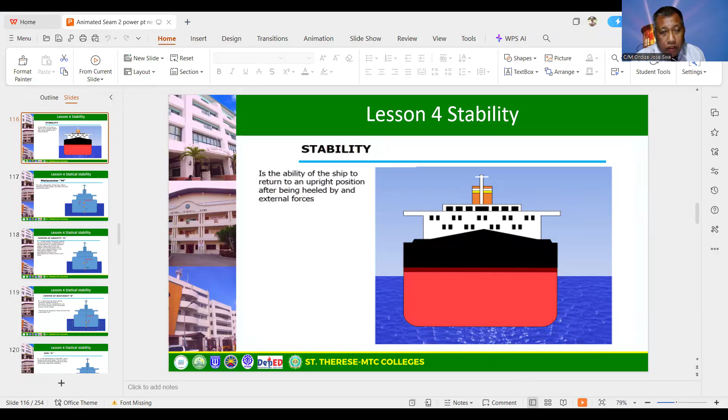Our lesson is all about ship stability. So how do you define ship stability? All of the previous lessons defined some terms about ship stability. It is the ability of the ship to return to an upright position after being heeled by external forces.

So it is acted upon by wind or waves, or any external forces. To compute the stability, we will learn different terminologies like the moment, initial stability, and the movement of the center of gravity. As I said before, the center of gravity will move when the ship is heeled. Once it is stable, when the center of gravity shifts, it pushes toward the center of buoyancy and brings it back. That's why the ship is stable, since the computation of the cargo on the ship is correct. So the center of buoyancy is the moment that brings it back upright.

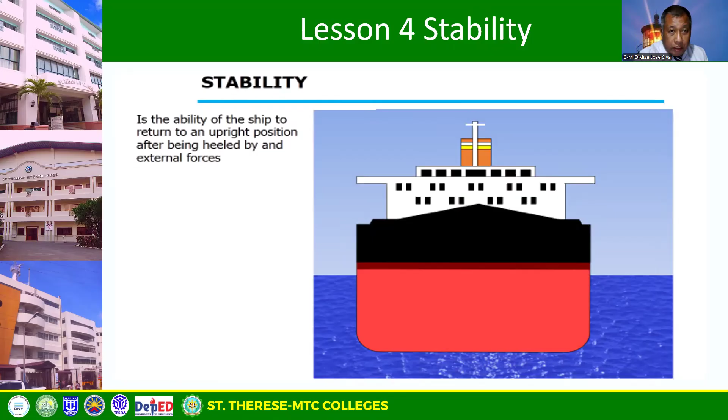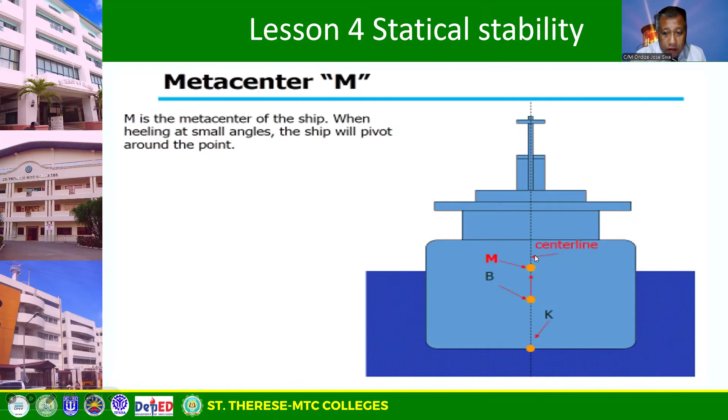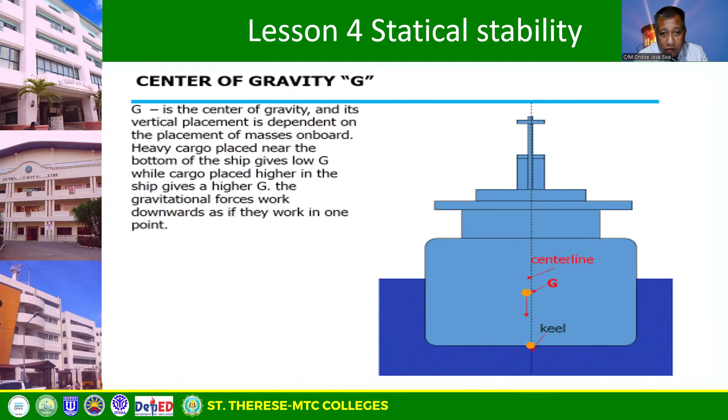So that's how important it is. Since when the center of gravity G shifts, the buoyant force B follows and pushes back to make the vessel upright. That's why it is stable. But if your computation of GM is not correct, instead of making it upright, it will be pulled down further. So let's move on - this is B, the center of buoyancy.

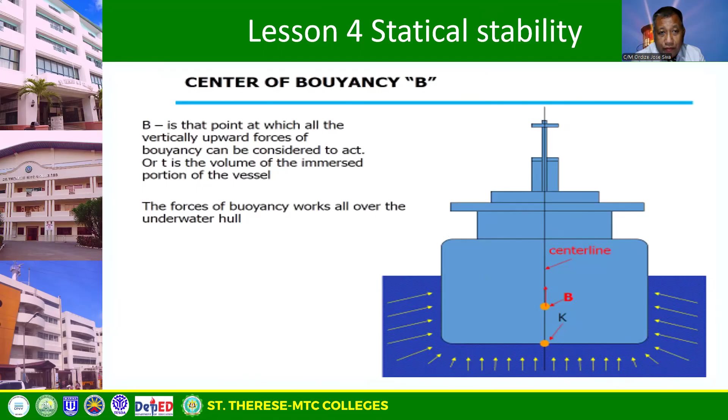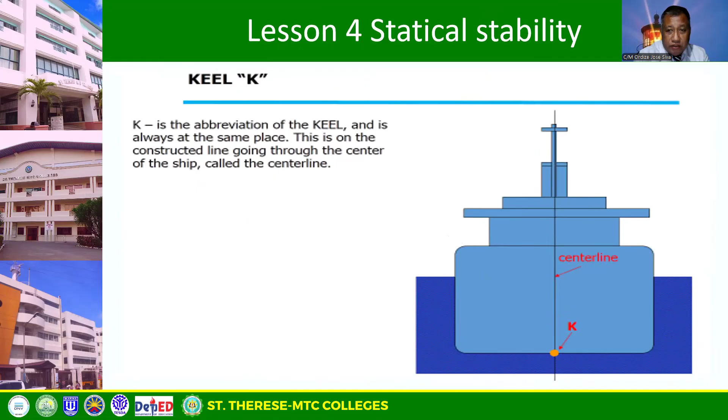So let's proceed. K is the keel, the abbreviation for the keel. It is constructed through the center of the ship, called the center line, the backbone of the ship.

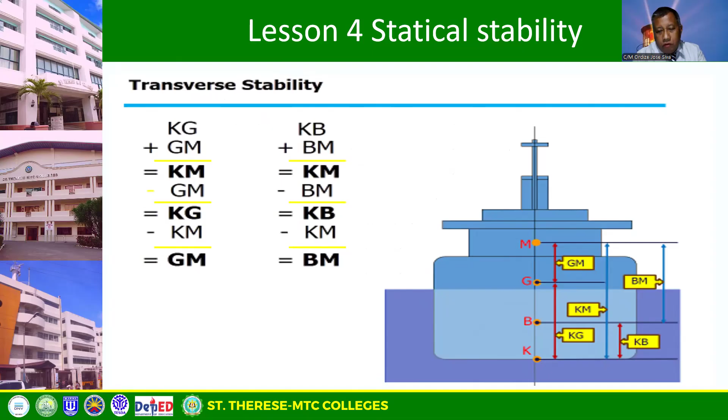It refers to the tendency of the vessel to return to its upright position when outside forces affect the ship, when, for example, the ship inclines or tilts. So the G or the center of gravity shifts.

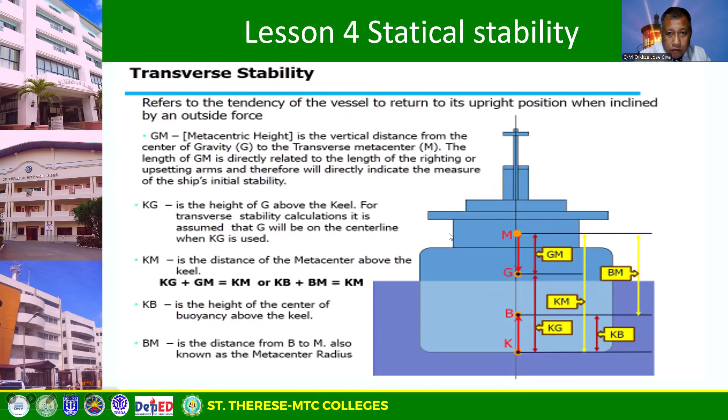So G will be in the center line, meaning KG is used in the moment calculation. Okay, so that's the explanation.

If the ship inclines, let me explain. K is what we call K, then the metacentric height is there. Meaning K to the metacentric height, just look at it, from K to G, G to M, then K to B, B to M.

M is here. Now, when the vessel inclines, the center of gravity also inclines, so this becomes Z. In some books, they call it G1, so we also use G1 or Z. Meaning from the center of gravity to the shifted center of gravity is GZ.

Look, it follows the buoyant force, parallel, from the bottom of Z or the center of gravity of the ship is the center of buoyancy that follows to bring the ship back upright. So the ship is stable because of that center of the buoyant force, following the buoyant force and pushing it back.

Now look at this, just a simple triangle. So the solution, okay, for us the GZ, then GM, okay, so for example...

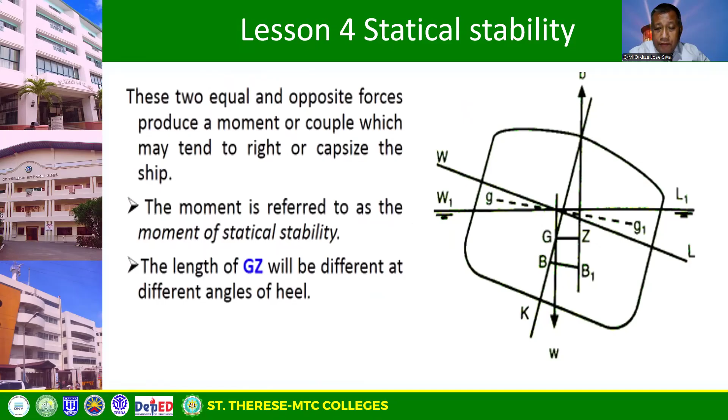Dira magamit yun na paskin sa navigation ba. So the length of the GZ will be different at different angles. Kung ano kapadako man iyang pag heel, so amo na iyang ang angle.

Okay, so amo na siya, no? So meaning the righting moment or the buoyant force is the by B, amo na siya, no? So meaning amo na siya, no? GZ, GM. So the righting moment equals to the weight, no, times the GZ.

Righting moment na siya, or the weight times the GZ, no? Okay. So amo na siya ang gatulak pabalik sa iya, the moment, no? The righting moment. Okay? So let's proceed.

So meaning ang distance is the GZ, the weight, or the weight is the force of the gravity, no? So the righting moment equals force times distance. Hindi pala ang force, work equals force times distance. So meaning righting moment, or the work sa physics nyo bala, is force which is the weight times the distance nga GZ. Okay?

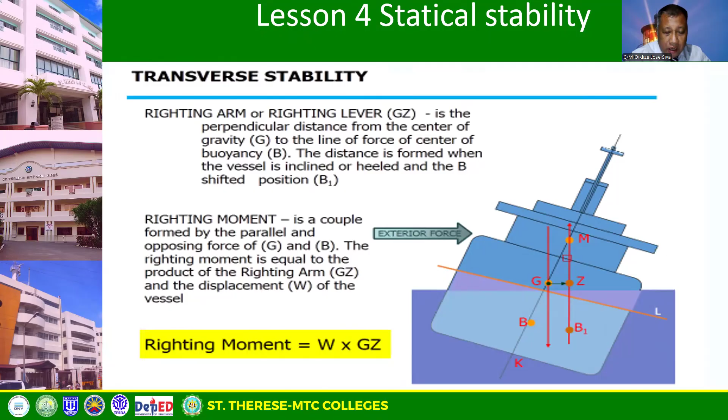So that is the exterior force, meaning again kuyop siya sa hangin or gin tulak kabalot. Okay. So the moment of the statical stability or the righting moment, the same man na sila gyapon, no? So meaning nag-ilis lang kita sang imbis nga righting moment, or the what equals, amo na siya ang iyang moment of statical stability. So amo na siya.

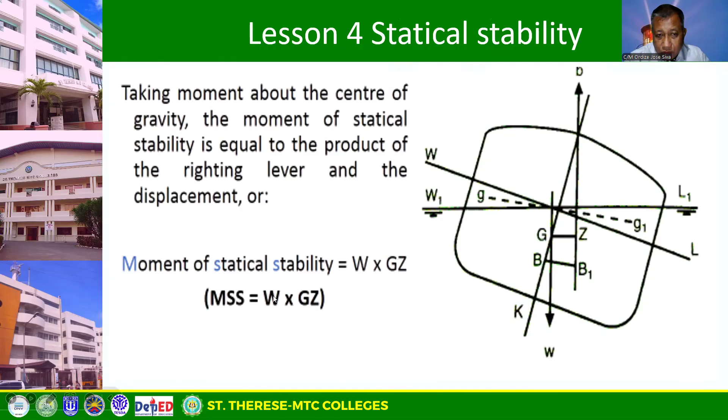So amo nang righting moment, no? The moment of statical stability. Walang daw GZ, no? Ang biggest sunod. So amo na ang moment na ang GZ. Okay. Ang distance niya na. So meaning, the moment of statical stability, tandaan nyo, weight times GZ, or the weight, or the gravity, or the loaded kung ano, load cargo mo ni eh. So W times GZ. Okay?

So the weight of the ship is represented by W, the vertical force or the downward force through the center of the gravity. So the perpendicular distance, lines of action of the GZ, is called the righting lever.

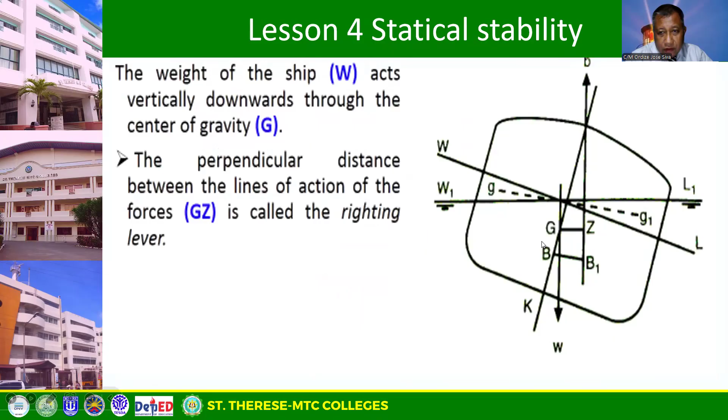So the distance from the center of gravity and the shifted center of gravity nga nag-shift, ang distance na mo, amo na ang righting lever, no? Or so the force, buoyant force, amo ng righting moment niya. Okay, so let's proceed, no?

So initial stability, then the wider the, okay, the greater stability. So amo na siya. So let's proceed.

The same ang gyapon, no? When we call it for the buoyancy, no? The initial stability amo ni ang iya gyapon nga representation, no? Sa keel, tapos metacentric height, the center of buoyancy, which is one half of the ship draft, then the center of the gravity. Ini siya.

Lahat anawa, naghalin man nagyapon sa figure sang trigo. So, ari siya, og kuha nato ni ang amoni nga senaryo nga angle, inbutang nato niyo. M is the, then, angle theta equals opposite over adjacent.

No, sin theta. Therefore, sin theta equals opposite, which is GZ, over hypotenuse, meaning, or GM. So, meaning, sin theta equals, kung solve mong sin theta equals GZ, opposite over hypotenuse, GM. No? But then, kung GZ ang imo pangitaon, all the, is GM times sin theta.

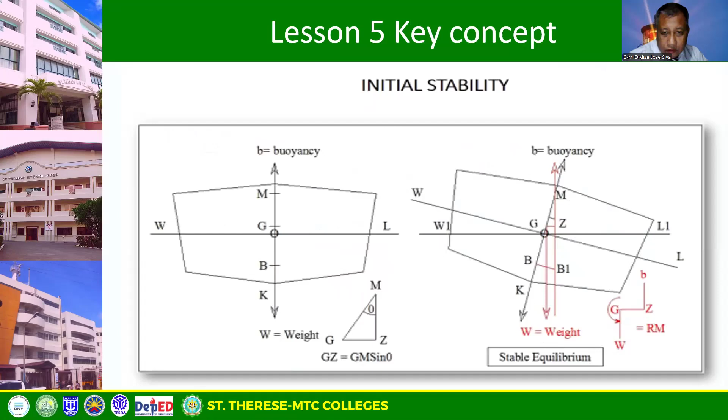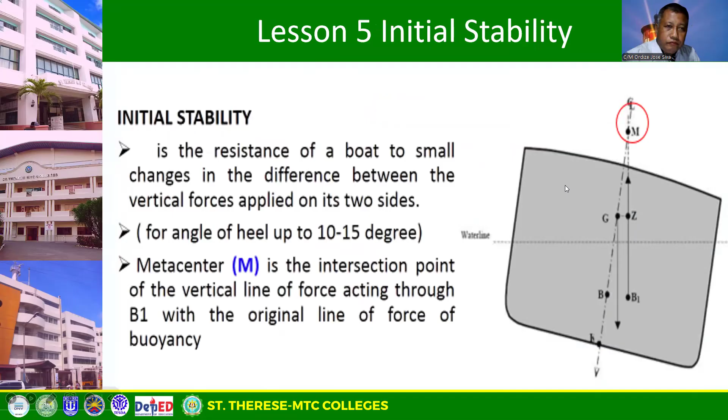So sin theta equals GZ over hypotenuse GM. Okay. Opposite over adjacent. Opposite over hypotenuse, I mean. Opposite over hypotenuse. Okay. So, tandaan, no? Ay mahatag lang ko mga problem solving. Okay.

So, just familiarize with the formula. GZ equals GM times sin theta.

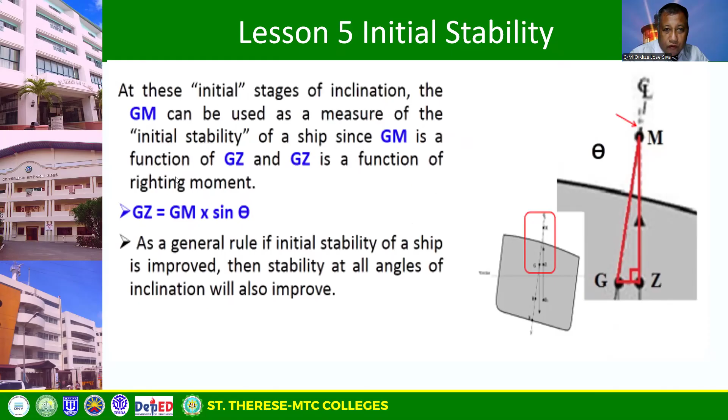Anyway, I'll recap this when we have our face-to-face. As a general rule, if the stability of the ship improves, then the stability at all angles of inclination will also improve. That's why the ship is upright and stable, because of the buoyant force or the righting lever that pushes it back. The buoyant force pushes back depending on how far the center of gravity of the ship is from the center of buoyancy, due to the righting moment. So the righting lever is the GZ.

Okay, so it's still the same. A stiff ship has a large GM; when the ship heels, GZ is large. So a stiff ship is like cargo vessels, while a tender ship is more like passenger or container vessels.

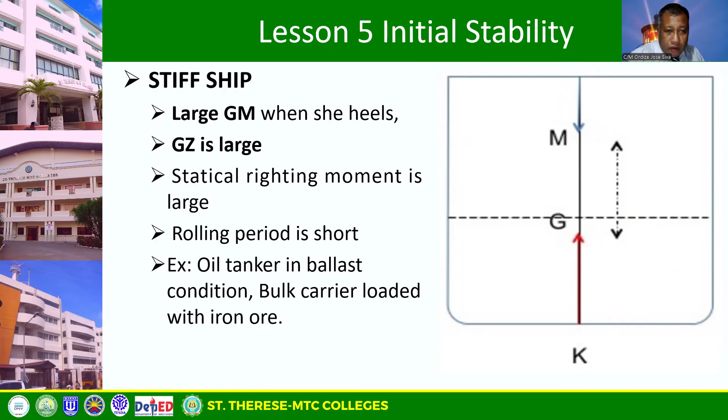So a tender vessel has a small GM, so its rolling period is long and lively, but the listing is smoother.